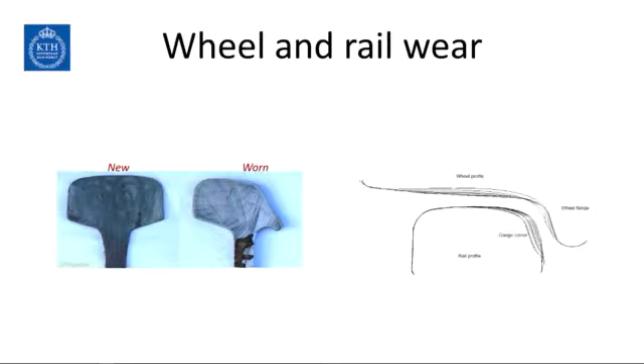We have been working on this probably for 20 years, and a lot of people have worked on this issue in our group. I think I don't need to talk a lot about this here in this group, but you know that wheel and rail wear or rolling contact fatigue issues can be a severe issue for railway operation, can cost a lot of money in maintenance or replacement of wheels or rails and so on. So we all know that.

So therefore, we tried to develop methodologies, not only with field tests but also with the help of simulation, to predict first the wheel wear. That picture has been presented before, that's not new, and also, as said, other research groups are working on that, I know. But the basic idea is that you build up a good multi-body simulation model of the vehicle you are studying. You gather as much information as you can about operational conditions to build up good simulation cases.

Then you do simulation and calculate where do I really have wear on the wheel, where do I have wear on the rails, and after a certain time, if you do a wheel wear calculation, you update the profile of the wheel, and then you start the simulation again until you reach a certain running distance you want to reach. In this procedure, there are at least two issues which are important, and I will come back to them later.

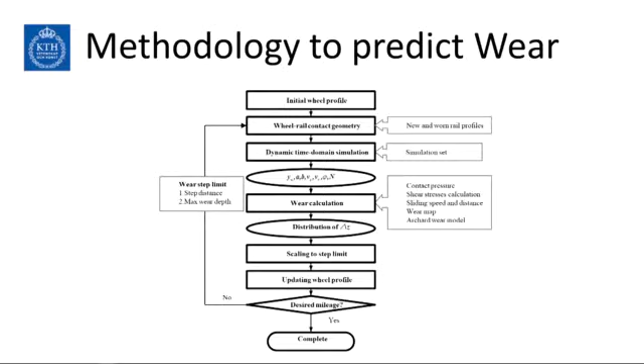On one hand, you want to employ very good contact mechanics because you really want to know where do I have this sliding, where and how big stresses do I have in the contact. So you really want to know the details on the contact conditions. On the other hand, you have to do a lot of simulations, a number of operational cases, and then a lot of, as we call it, wear steps, so many simulations. So the contact mechanics you use need to be computationally efficient, otherwise it takes too long to do these calculations, and this is important to have in mind.

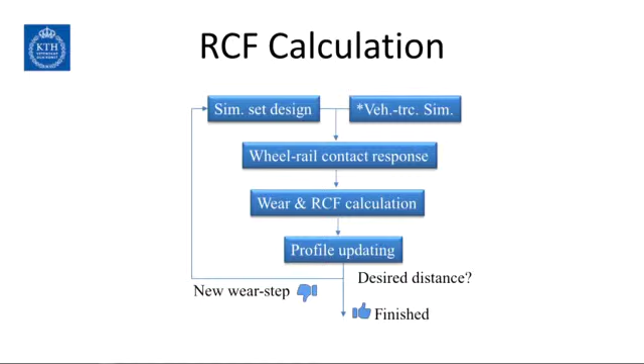We have come up with a very similar procedure even for RCF calculation. It's mainly the work of Saeed Hossein-Nia, who is here also. It's a lot of your PhD work, where we, again, do simulations, calculate the wheel-rail contact response, and then we do wear and RCF calculation. I will explain a little bit more about it.

We do, on one hand, the RCF calculation, where we count, so to say, the exceedances of the yield limit, but in parallel, we also do the classical wear simulation to always calculate with the correct profile geometry, because this determines very much the stresses you have. If you have wrong profile combinations, then you get wrong stresses, and then everything gets wrong. Therefore, we do both in parallel there. But the basic idea is the same here.

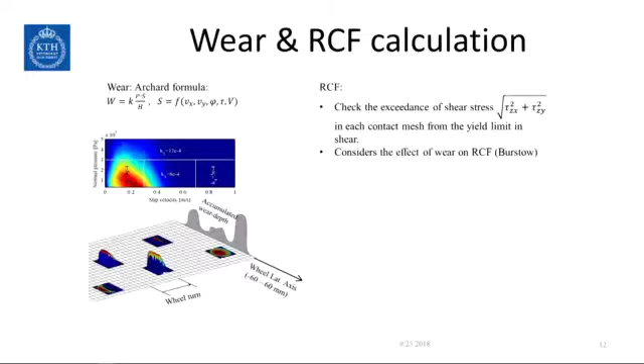As said, on the left-hand side, you have the classic wear calculation, where we also use the wear map that has been mentioned many times during this conference already, and we use Archard's wear law. I will come back to this later also. And then at every wheel turn, we calculate the sliding speeds and calculate the amount of wear you have per wheel turn. And to judge the RCF risk of the profile, we check the exceedances of shear stresses. So do they exceed the yield limit?

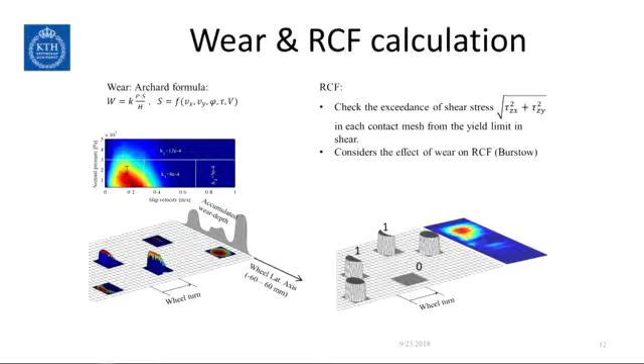And because if you only consider rolling contact fatigue, crack initiation, crack growth, then you would overestimate the rolling contact fatigue risk. Therefore, we scale it by considering the wear, and there we use the wear law of Burstow. We just say if you have a large RCF risk but low wear on that part of the profile, we keep the high value of RCF risk. But if you at the same time have very high wear, we reduce or even remove the RCF risk.

And this is shown a little bit on the right-hand side. On both parts of the profile, you might have more or less the same RCF risk, but on one part of the profile, you have very little wear, and on the other part of the profile, you have a lot of wear at the same time.

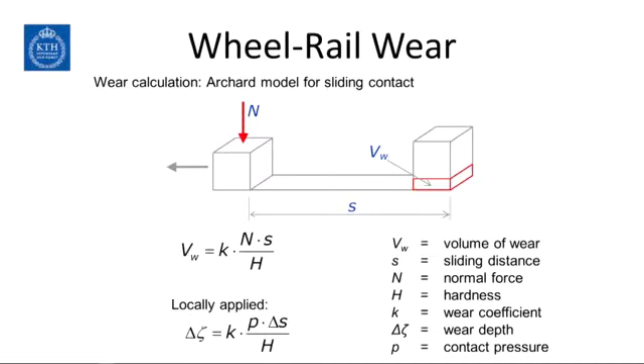I come back to this, not because I think you don't know it, but because I need it for later, to talk about Kalker's theories and what we use in addition to that today. As we have heard yesterday already, many of us use the Archard wear law, where the wear is basically proportional to the sliding distance in the contact.

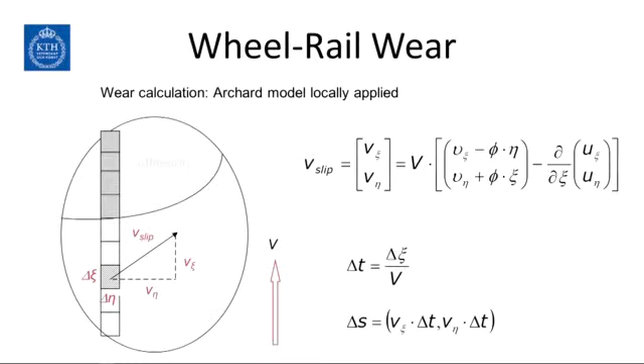You can translate it even to a local law where the wear depth, then it's not a volume, it's just the wear depth, is proportional to the sliding distance. And to know exactly where on the profile this happens, you have to divide the contact area into a mesh, say perhaps 40 elements or whatever, and then in each element you calculate the wear. If there's slip, then you get wear. If there's no slip in the adhesion zone, there's no wear.

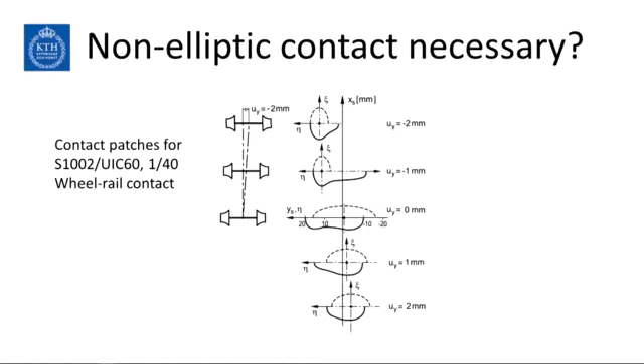Here, there's not very much difference between the Hertzian and the non-Hertzian solution, but here is quite a difference between those two. And with a non-Hertzian solution, you might get wear here, but with a Hertzian solution, you don't even have contact there, so you can never get wear there. So it's worthwhile to think a little bit of this. And also, if you use FASTSIM, there are some limitations.

You have to have in mind that before starting to do wear or RCF calculations, we were mainly interested in the total force from the contact, the integration over the contact stresses, to calculate ride comfort, stability, curving behavior of a vehicle. And then I think even though there are some errors, this is fine. But if you want to really calculate stresses, then you have to think a little bit more. And then there are some limitations with FASTSIM.

It uses a parabolic traction bound, which gives quite a good estimation of the forces, but a less good estimation of the stresses. A colleague of mine, Martin Sichani, that was mainly his PhD thesis, saw that the shear stress estimation error with respect to CONTACT may rise to 33% at the point of contact. He also looked at strip theory that is used by a lot of people, which is quite good, but also has some limitations. If you have a contact ellipse where a over b is larger than 1, then the strip theory doesn't work so well. And also for high spin cases, strip theory does not work very well.

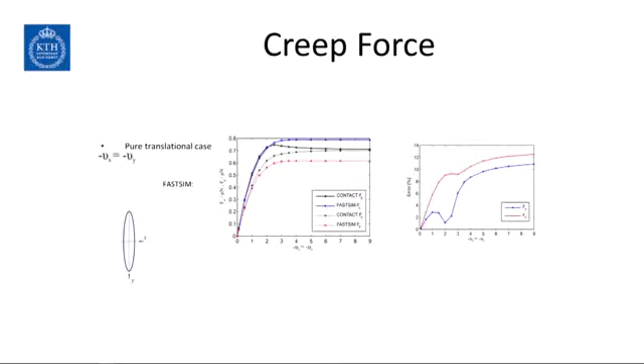So Martin came up with a theory that tried to combine the strength of both FASTSIM and strip theory. For example, he used an elliptic traction bound and nonlinear growth of shear stresses from the stick zone to the slip zone, but it still uses FASTSIM to determine the direction of the stresses. Here you can see a comparison between CONTACT and FASTSIM. We can mainly look at the errors. They can go up to a little bit above 10% here for the lateral force. For the longitudinal force, it's about 10%, the maximum error you get when you use FASTSIM compared to CONTACT.

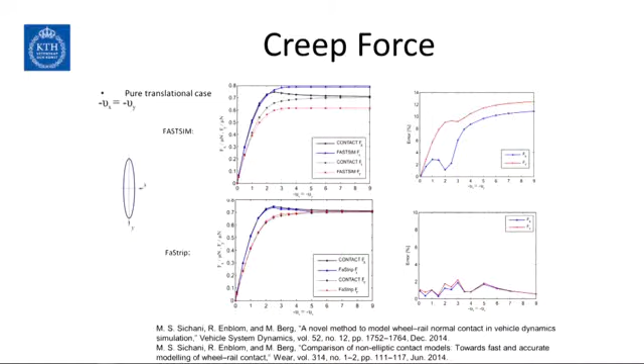Above the same pictures, but below the pictures with FaStrip, the newly developed tangential contact theory, and with that, Martin could reduce the errors to below 2% between CONTACT and FaStrip. Martin also looked at the normal contact, and I was very happy yesterday. I heard a colleague talk about Martin's solution, ANALYN, for example. That is what he employed in the vertical direction.

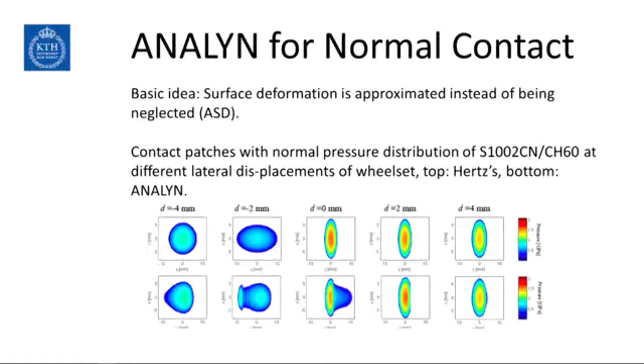And just the basic idea is that sometimes the surface deformation is just neglected, and Martin's idea is to approximate the surface deformation instead of neglecting it. And then he uses, not as in the Hertz solution, constant curve radii, but the curve radii can vary, and so he comes up with non-linear, non-elliptic contact patches compared to the Hertz solution.

And using both ANALYN and FaStrip, you can see on the left-hand side the solution that you would get if you use Hertz and FASTSIM. This is CONTACT, which we for now say is the exact solution. And in between here, you have the solution with ANALYN and FaStrip, which is actually relatively near to the CONTACT solution.

And when it now comes to the shear stresses, very important for rolling contact fatigue prediction, you can see that in the center of the contact with Hertz and FASTSIM, you get that shear stress distribution, and with ANALYN and FaStrip, you almost get the same distribution as you get with CONTACT. And if you look at a cross-section here, then we have the case which I mentioned before.

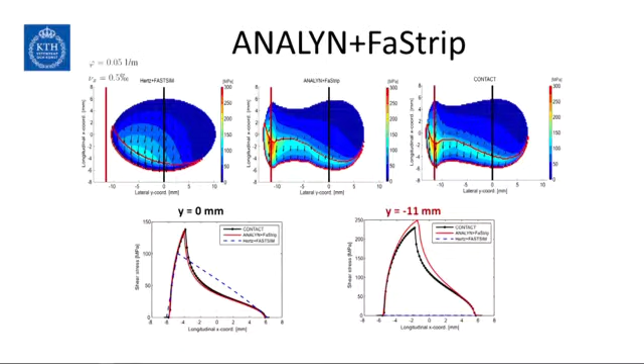With the Hertz solution, you don't even have contact there, so the shear stress distribution there is 0 with the Hertz solution, but with CONTACT, you have a contact there, and you get a shear stress in that part of the wheel or the rail.

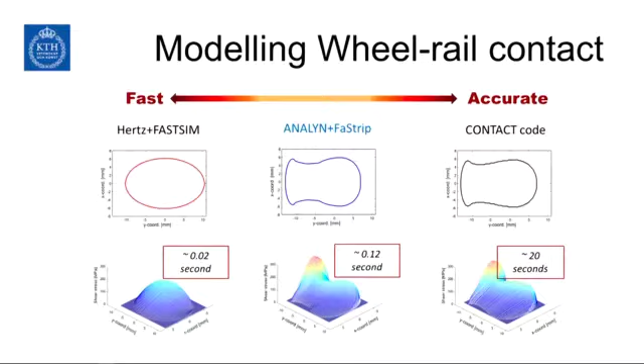So here we are at the trade-off again, which I mentioned before. You would like to employ the CONTACT code when you do the wear or RCF calculations, but as said, since you have to do so many calculations and so many wear steps. Don't look too much at exactly the simulation times. They depend on so many things, but I can say even using Hertz and FASTSIM, it can take between 24 and 48 hours to do this wear prediction calculation, if you want to calculate up to, say, 200 or 400,000

kilometers. So actually, we are even concerned using Martin's theories, because if you have a factor of 10 and it takes 24 hours now, even that is a step which is difficult to take. So it's really important to be numerically efficient, even with today's computer capacities.

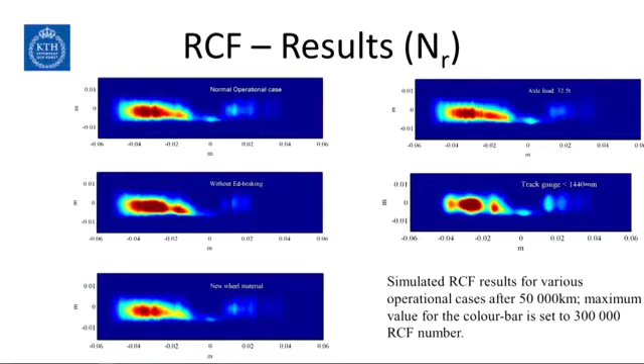They are even thinking of increasing the axle load further, so we calculated with increased axle load and also with different track gauges, because they usually have quite a lot of gauge widening there on their tracks. And how does that influence? So just to give you an impression, what type of studies did we do with this type of simulation tool.

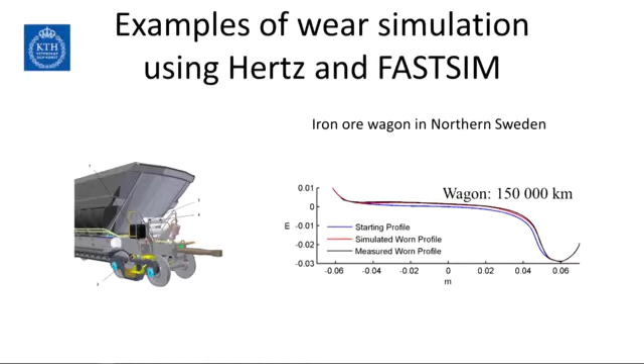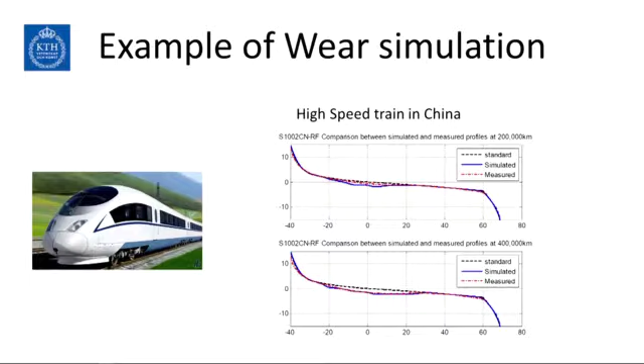And the good thing here is we did not have access to the measured wheel profiles before all simulations were done. So we had no chance to adapt anything to the measurements. That was done and given out, and then we got the measurement results. I was a little nervous, I have to admit that, but we got a good result there.

So, to my last slide, what could we conclude from this? Even though Joost Kalker's FASTSIM algorithm has some limitations and using elliptic contact doesn't seem to be very obvious, in many cases you still get good results. And I wanted to give that picture because I remember I was myself so astonished as a student, Klaus Knothe teaching me rail vehicle dynamics and contact mechanics, and when I saw what a rough simplification FASTSIM actually is,

employing an elastic bed and a brush model where the stresses only depend on the deformation at that point, and not as it is in reality, where a load somewhere here also influences the deformation, or the deformation here influences the stresses everywhere in the material. When you just see this, you cannot imagine that you can get so good results with this, as it seems quite a rough simplification.